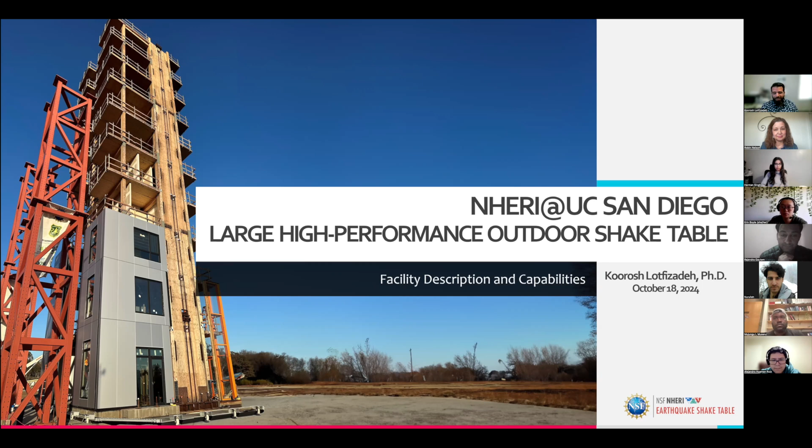Today, I'm going to briefly go over the shake table facility, what we do here, the importance of it, just to give you an idea of the type of work we do, and hopefully inspire some people to pursue this kind of work. As an outline, we're going to briefly go over the Englekirk Structural Engineering Center, the home to the shake table facility. I'll talk about the shake table itself in the original configuration, the upgrade that we did recently to bring it up to 6 degrees of freedom, give it its full potential. We're going to look at some of our instrumentation and our data acquisition system that we have available here to collect the important data that we want, and maybe touch on some new research opportunities that are made possible by this facility.

So who are we? The leadership team at the NHERI at UC San Diego Shake Table facility consists of a principal investigator, currently Professor Joel Conte, and 4 co-PIs and myself. In the coming weeks, we are going to have a little bit of a change with the leadership. John McCartney is going to be the new PI, and Joel Conte is going to be a co-PI, but that hasn't happened yet. So for now, this is the current breakdown of the leadership team at this facility.

There's a lot of text here. I don't expect anyone to read it right now, but if you want to reference it later, it gives a little blurb about what each person is responsible for at the facility. Running and operating such a large scale experimental facility requires a lot of work, and it's too much for just one person to handle. So we break it out in a work breakdown structure, and each co-PI has their own domain where they focus. So you can read that at a later time.

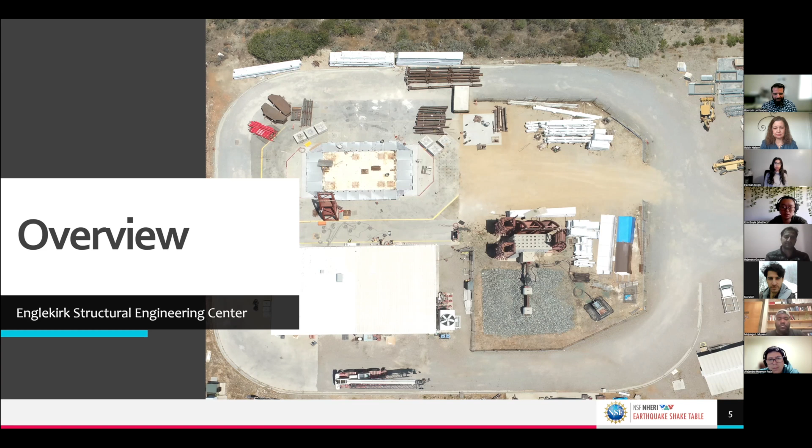An overview of the Englekirk Structural Engineering Center. So I mentioned that name. It's more than just the shake table. We have a large facility that's about 10 miles east of the main campus at UC San Diego. It's kind of a bummer because the main campus is right by the beach, but we're inland a little bit. But we have more than just the shake table. And just to give you an idea, the shake table is what you see here in this yellow color.

platform, but the facility extends way beyond it, and it kind of continues on to this side. We have two large soil pits and a strong wall, if you will, a reaction wall, where we can attach actuators, embed specimens inside either the north or the south soil pit. And just for reference, down here on the screen is the north side, above the screen is the south side. So we can attach actuators and do some testing, cyclic testing as needed in these soil pits for soil structure

interaction. We have, of course, the shake table facility and another facility, our blast simulator or extreme event simulator facility. It's been offline for a little while. We're working actively to bring that back online and refurbish the equipment. What that facility is capable of doing is simulate blast events or impact loading without using explosives. So it uses some really high-speed actuators that can generate incredible forces at an impulse and retract, not have that follow through. So you simulate an actual explosion type of event.

In addition to what you see here that I didn't even highlight, we have some geothermal work that we do with solar arrays in the back over here. And along the entire length at the back of our facility, we have a full-scale railroad where we can do non-destructive testing and damage detection on rails. So we do a lot of work, but this presentation primarily focuses on the shake table facility.

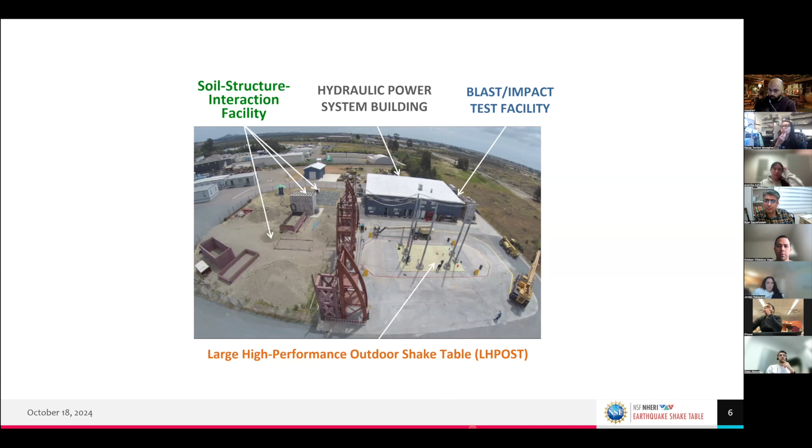The Englekirk Center, our center, we are an accredited ISO 17025 testing laboratory. So all the data that we produce here is accepted in more than 80 countries around the world with no questions asked, because all of our equipment, all of our sensors are fully calibrated and documented and traceable. So the data that we collect is, of course, vital. You don't run an experiment and not collect any data. That kind of is pointless. So it's a pretty important thing to have this type of accreditation.

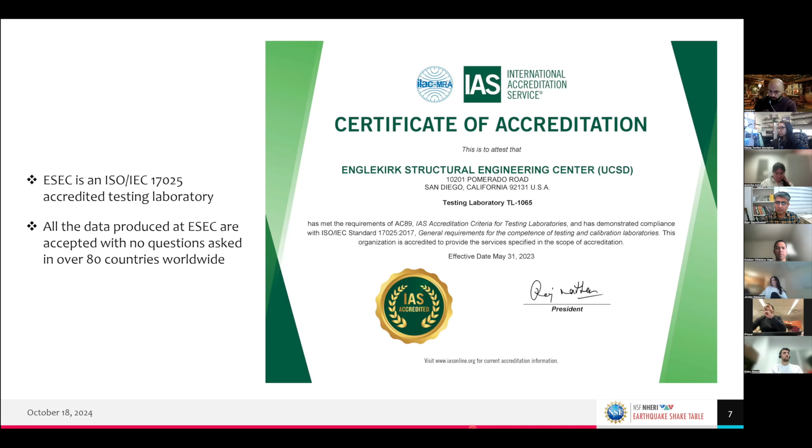So the shake table itself, let's talk about this a little bit. We've been in business for about 20 years now. Brief history of the shake table. It was designed and built in 2001 through 2004. It was commissioned in 2004. It was originally funded by NSF under the George E. Brown Network for Earthquake Engineering Simulation, the NEES program. And we got some additional funding from the Department of Defense to build this shake table.

From 2004 to 2014, our operations and maintenance was funded through the NEES program. There were two chunks of 5 years, similar to NHERI. That evolved into the NHERI program in 2016. We were funded through the NHERI program through 2022. But somewhere along the line in 2018, we got funding from NSF and some additional funds from the university here to upgrade the shake table to 6 degrees of freedom. This gives us a lot more capabilities, and we'll talk about that in a little bit. We reopened the facility around April, I want to say, of 2022, and we've been back in business since then, and our operations and maintenance has been funded through the NSF NHERI program.

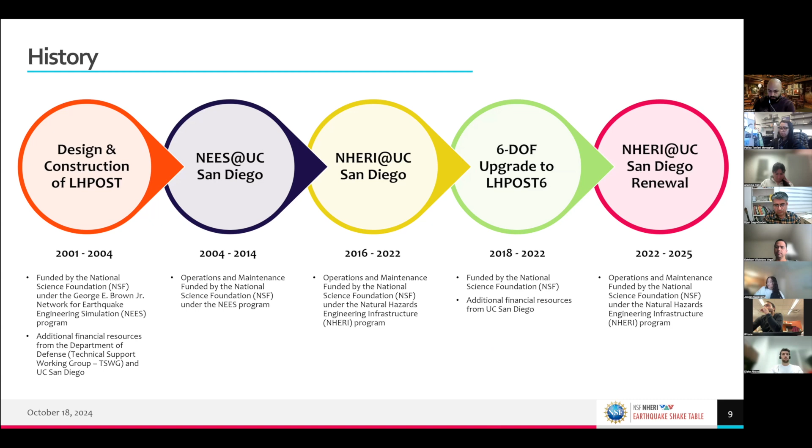So the original shake table that was built 20 years ago was a single degree of freedom shake table. We used to have an actuator on the west side and an actuator on the east side, and we could only shake in one direction. We call that single degree of freedom. The platen itself is rather large. It doesn't look huge on this picture here, but it's 12.2 meters by 7.6 meters, so 40 feet by 25 feet. And it's a pretty large, heavy steel platen. And we can build specimens on it and attach it to the shake table and run some tests.

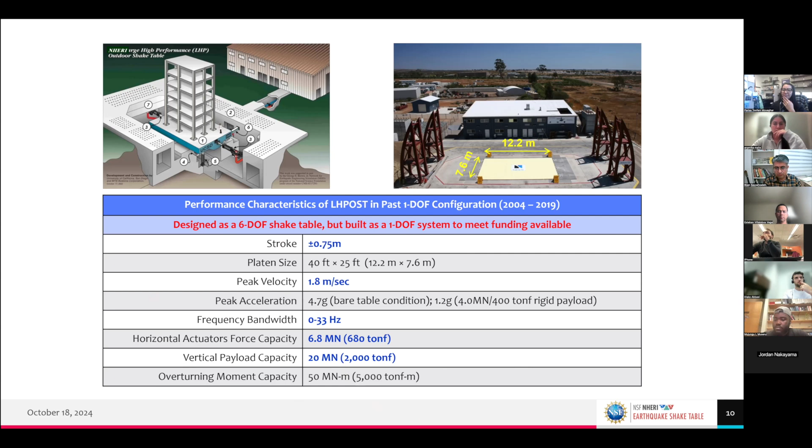It was always designed to be a 6 degree of freedom shake table. Now, when I say 6 degrees of freedom, I mean you can move in the horizontal direction, you can move in the lateral direction, you can go up and down, so you got all your translational movements. And in addition to all that, you have your rotational degrees of freedom. So you have your rolling, your pitching, and your yaw motions as well. So with all those 6 degrees of freedom, you can move in any direction physically possible. Of course, within some limits, you can't just infinitely rotate. But here, again, I'm not going to bore you all with the details. You can reference this later if you'd like. But we have some performance characteristics of the stroke and the accelerations and velocities, etc., of the original system.

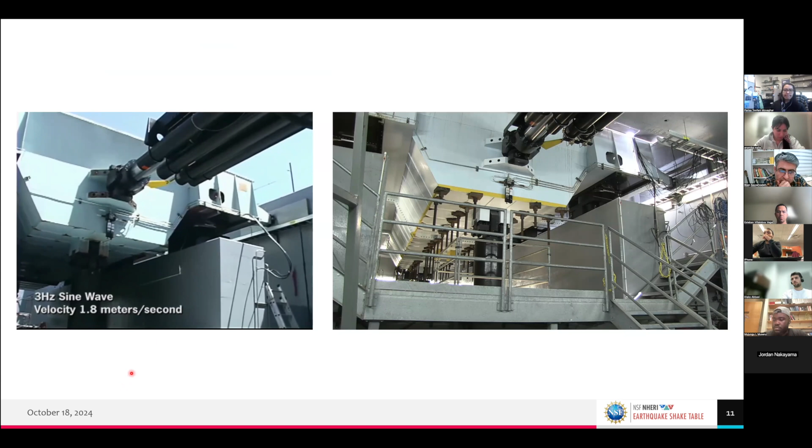Now, this is all abstract, so let's take a look at a video. On the left side here, you're going to see this is when we were commissioning the shake table back in, I want to say 2003, early 2004, where we're just demonstrating that this system can push and pull the shake table with a sine wave. So just kind of cycle it back and forth at its capacity, 1.8 meters per second. So that's pretty violent. But we rarely just do cycles. We want to play back an actual earthquake. So this is after the commissioning process was complete. This is an actual earthquake.

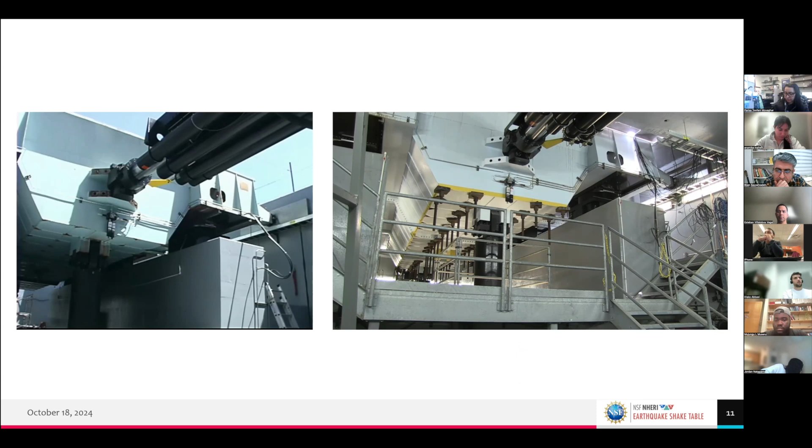Yeah, pretty standard. But you can see that we can only push and pull the shake table in one direction. At that point, we still had very good tracking performance. When you give it an input ground motion, you want to replicate an earthquake that has already happened, we usually have an acceleration time history. So here in this little graph, you'll see an acceleration time history in units g over time in seconds. And if you zoom in, you can see that the target and our achieved was very, very close. So we were able to reproduce ground motions pretty accurately 20 years ago.

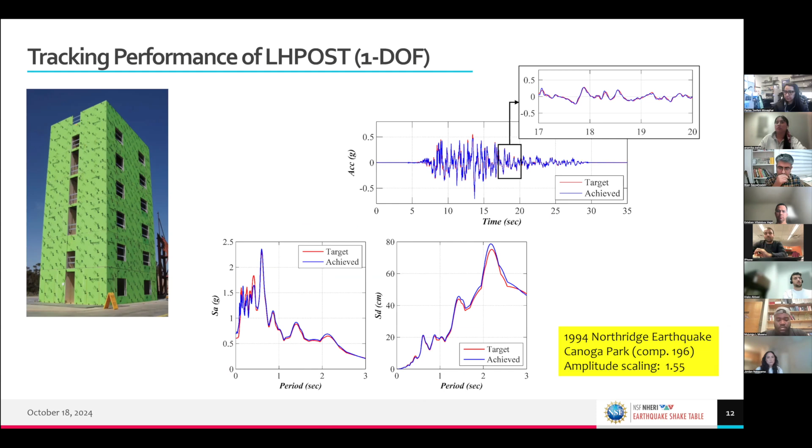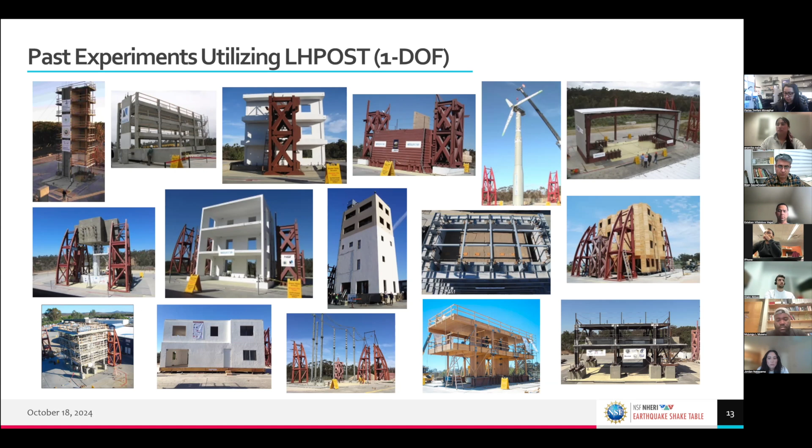You got your spectral accelerations and your displacements as well, and we were able to hit those targets with very high accuracy. This allowed us to complete over 30 major projects on the shake table, ranging all sorts of different buildings. So we had power transmission lines, reinforced concrete buildings, a parking structure, wind turbines, some geotechnical soil boxes with embedded piles and sound walls, timber buildings, masonry buildings, all sorts of things, you name it. We've done some testing on this stuff. And it's been very helpful and useful for the entire natural hazards community because you do need experimental data to validate your models. And we'll talk about this in just a second too.

So looking a little closer at some of the past work that we've done here, this is an example of a project that was conducted, I want to say in 2011 or 12 maybe. It was a 5-story building, and this was a major project with high importance for this community because it was performed with 2 different systems. There was a fixed base configuration, which is a standard old building that's attached to the ground. And there was a base isolated version of this building. So we tested both phases to see the performance difference.

Now, if you're not familiar with base isolation, it's basically a layer that you put in between your structure and the ground that would separate the two and allow the ground to move at whatever frequency and acceleration that it is. And that doesn't necessarily fully translate to the structure itself. So we'll see coming up how that actually performed.

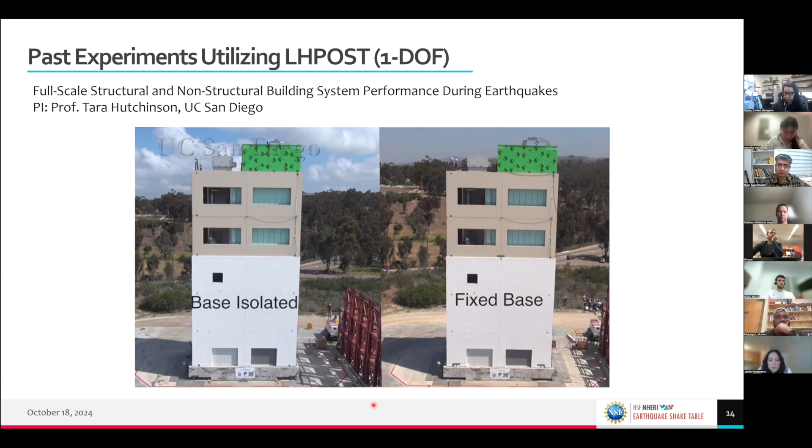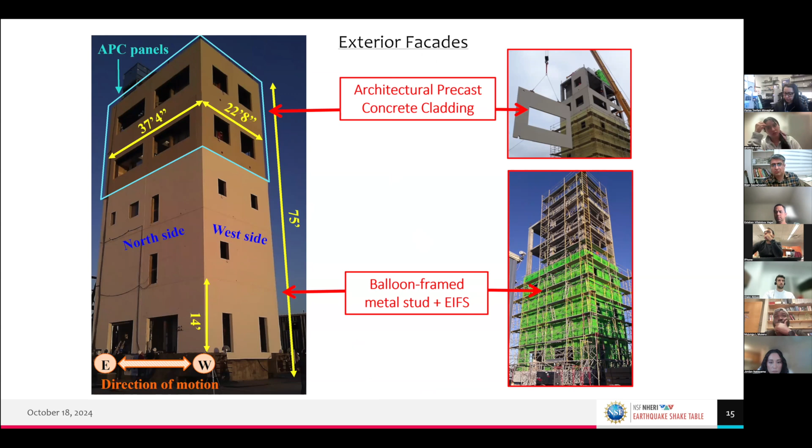This building, we call it the BNCS program. It was a 3-phase project on the shake table. It was a total building system with cladding and the facades. On the top couple of floors, we had precast concrete cladding. On the lower floors, there were balloon frame metal studs with a stucco finish system. It was 5 stories tall. Each floor had a different occupancy type, so we wanted to see how these non-structural components would perform during an earthquake. Also very, very critical for our community.

The bottom floor was modeled as a utility closet where we have utilities. There was a lab and a residential floor. There was a server room that later in one of the phases we actually set fire to. There was an ICU unit fully equipped with hospital beds. There's a surgical suite with equipment hanging from the ceiling. There was a full working elevator and a staircase inside this, and there were garage doors and different types of windows and doors throughout the building.

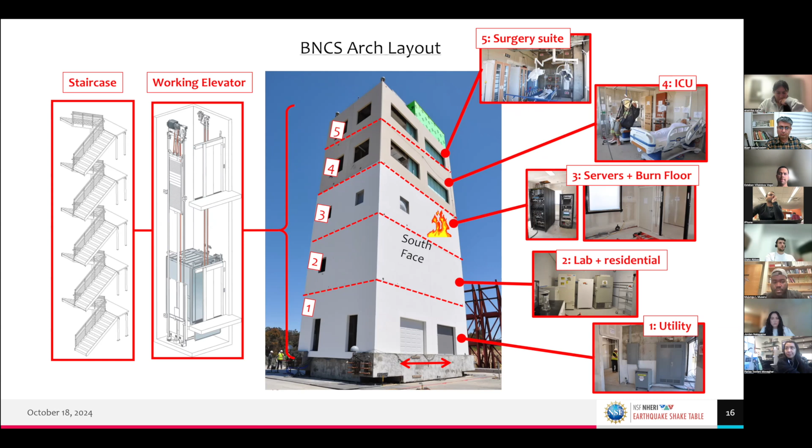So this was an all-encapsulating kind of project to see the performance of not only the structural components, but also these very, very critical non-structural elements inside a building. You wouldn't want to be getting operated on and there's an earthquake and suddenly the equipment just falls off. That doesn't sound very good. So this building, we'll watch a little video here of the performance. There's too much information here, so we're not going to talk too much about it.

But this thing that you see here is a base isolator. This is basically a lead core with rubber on the outside. On one end, it's attached to the ground, or the shake table in this case. And on the other, the building kind of sits on it and is attached to it. So you'll see as it's moving, the isolator kind of stretches and moves around, not translating all of the forces directly to the building. We have a little hysteresis plot here that can show the shear strain and the base shear on the building as well.

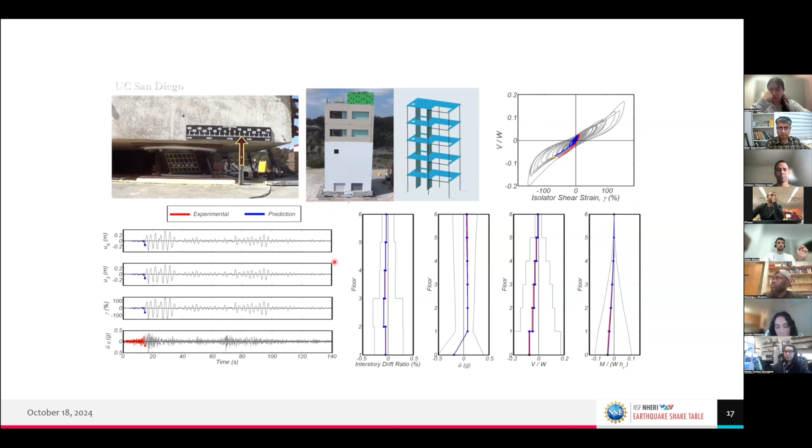In this video, we're going to see two comparisons. We're going to see a base isolated version and the fixed base version. So let's just take a look at this really quick.

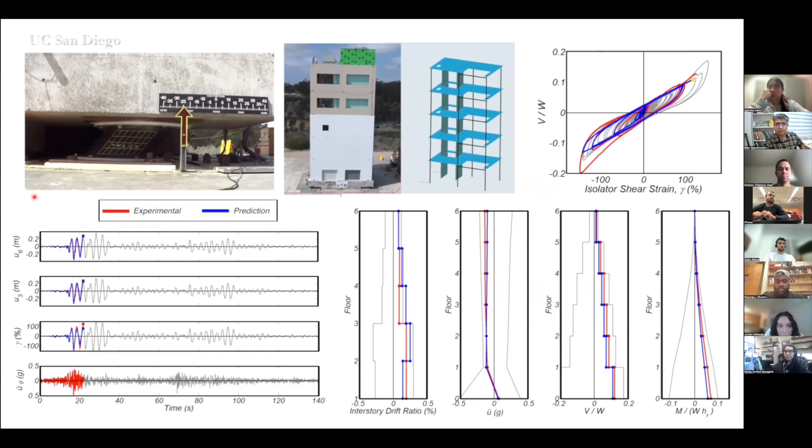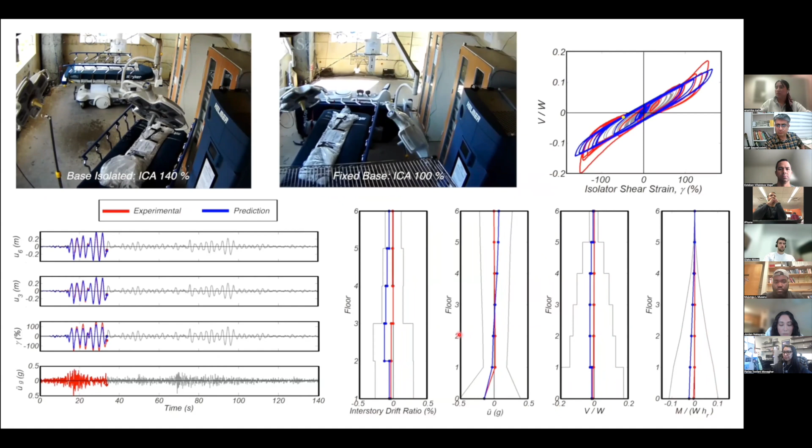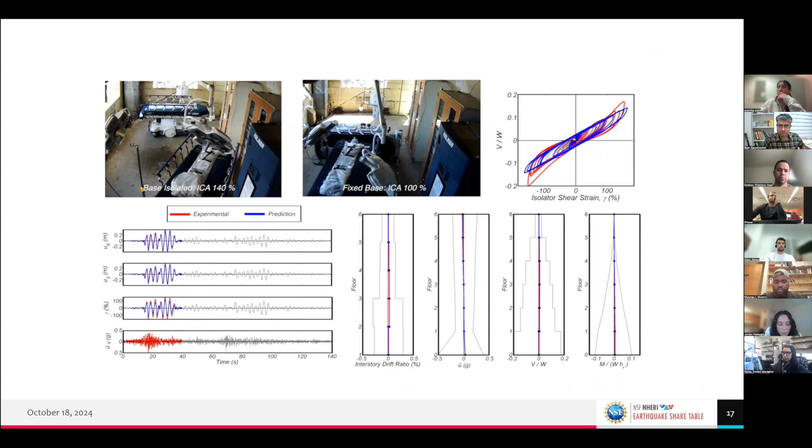So you can see as we're moving here, that isolator is really stretching, dissipating energy as it goes. And here is the base isolated and a fixed base. And you can see the difference in performance when you have a base isolator or you don't. An important thing to note is this is 100% scale of an earthquake from Peru. The base isolated version was 140% scale. So even higher scale accelerations, and the performance was so much better inside the building, just to demonstrate how critical that type of isolation system is.

Another important thing, and the reason I'm showing all of this, is the work we do is very important. There are some structural failures that are really difficult to capture accurately in computational models. Some of them could be bond slip, there's rebar buckling and fracture, there's slab failures at the column joints, a whole host of failure mechanisms are really complicated to capture.

So having these large-scale or full-scale experiments to see how these perform and collect data, we can validate our models, we can improve our models, and eventually progressively move away from relying on experimental testing and improve our models to a point where we can rely more and more on that. So we don't have to spend so much money and time on large experiments.

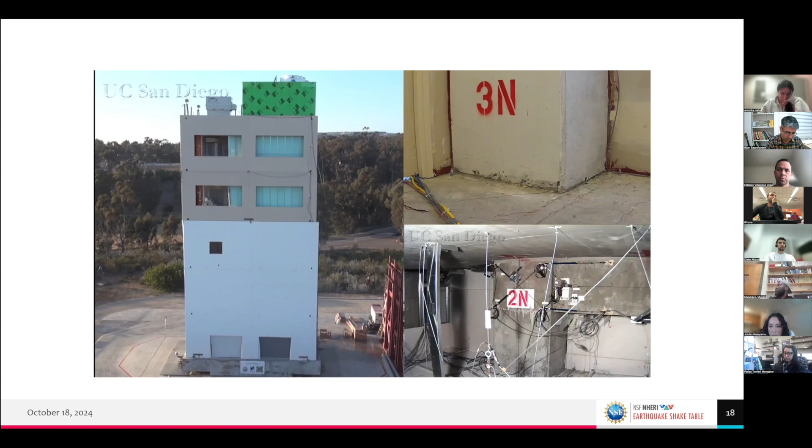This little video here, again, it's a short little clip. You'll see at the top, this is the slab, the floor, and a column on the third floor. You'll see the slab failure as this building is shaking. You'll see it start to pull and rotate, and that slab is failing at that connection. Right below it, on the second floor at the drop ceiling, this is a beam column connection. You'll see that as it's moving, there's some rebar at this joint here that buckle and fracture, and you'll see some little concrete exploding out as those rebars start to fail. So all of these failure mechanisms are really difficult to capture accurately in a model if you don't have this kind of baseline test data.

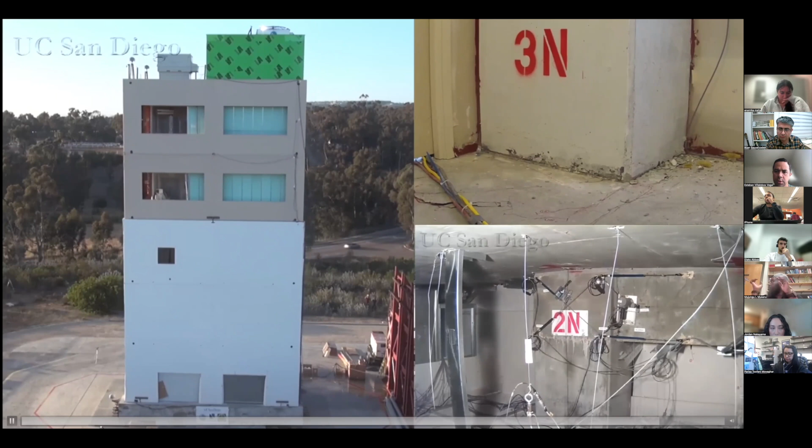So here we go, let's take a look at this. You see that slab here kind of bending up. That's a pretty bad failure. And boom, we just saw that explosion here with some rebar. And that joint is just fully opening and closing at this point. So it's lost quite a bit of its integrity. This is a fixed base test, by the way, not one of the base isolated tests. Oh, I forgot to mention at the top, there was also a full chiller system where you saw some water falling out as we were shaking it. So that was kind of cool.

I did mention earlier that we did some geotechnical experiments as well. So we can investigate a lot of soil structure interaction type of performance for structural systems using two large soil boxes that we have available at our facility. One of them is a laminar soil shear box that has multiple layers with rollers in between so they can move relative to one another. And one of them is a large stiff confinement box that you can embed specimens into, create retaining walls and things of that nature.

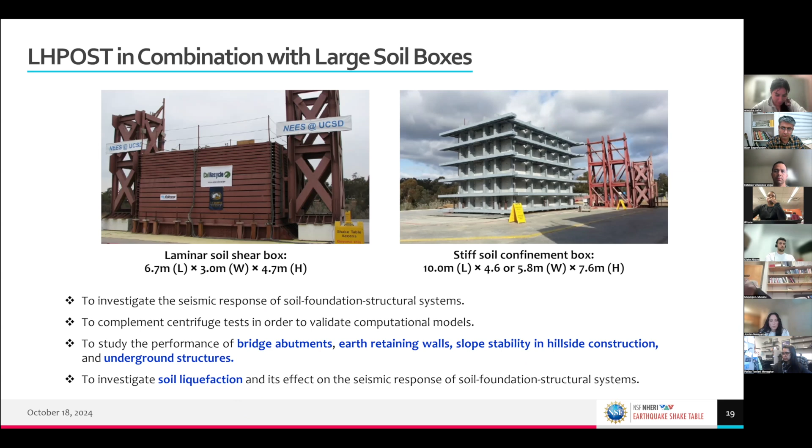So using these boxes on the shake table, we can validate our computational models and complement the centrifuge tests, because those are often on a really smaller scale. We can study the performance of bridge abutments, retaining walls, slope stability, hillside construction, and underground structures. So if you have a tunnel that you want to embed under the soil, we can do that kind of work. And of course, we can check liquefaction using the laminar soil box as well. If you're not familiar with liquefaction, it's when you saturate soil and as it shakes, it tends to kind of liquefy at the top. And that causes massive problems for structures that are built on top.

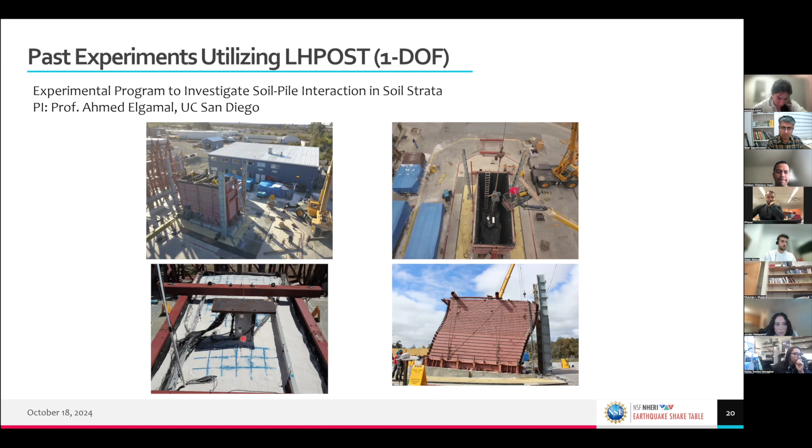Just another quick demonstration of one of the past experiments that we did here at the shake table, during the earlier phase in the single degree of freedom. This was a project that utilized the laminar soil box installed on a wedge to simulate a slope. This picture is after the test is already completed, but you can see how it deformed and each layer of that soil had moved relative to one another. Inside this box, they had a pile that was embedded, and I'll show you the video on the next slide of just how critical it is to have this type of box to do this testing. So we're going to take a look at this video. Just pay attention here. You'll see this pile, as you're shaking, it starts to walk. It starts to move.

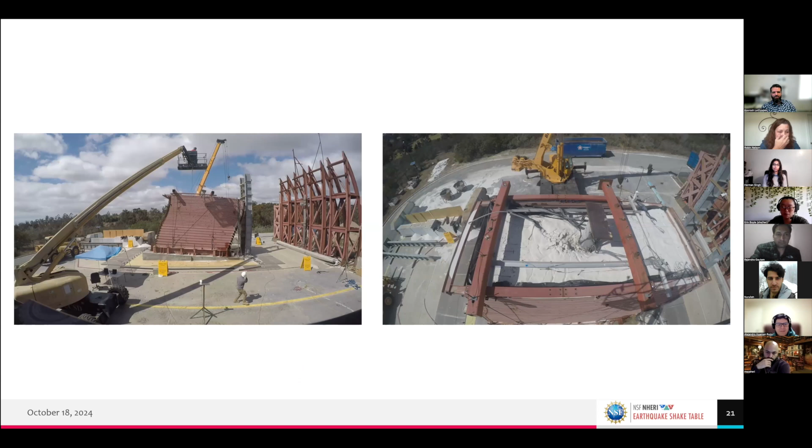Okay, so all of that was the single degree of freedom shake table. So we did all that critical work in just one direction of shaking. When we upgraded this system to 6 degrees of freedom, this opens up a whole new world of possibilities for us. The upgrade, just to show you what it looks like now: in the earlier slide, we had a little picture of the single degree where we had one actuator mounted on this end and one actuator on this end. This is just a little rendering, a little slice so you can see the insides.

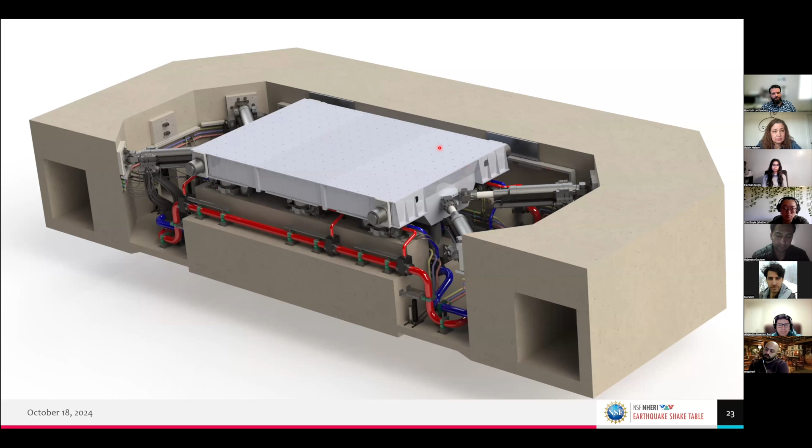Now we have 2 actuators on either side positioned in a V shape, and we have 6 vertical actuators underneath the shake table for the upward motion. So you'll see 3 of them on the north side that we're looking at right now, and then there's 3 mirrored on the south side. All of this is powered by a massive hydraulic system. Well, this all had to be redone for this upgrade because we now needed a lot more hydraulic fluid, a lot higher velocities, a lot higher flow, a lot of pressure.

So just to give you a brief overview of this, some of you have maybe been on a tour here at the facility. Those that aren't familiar, I'll spend a minute just looking at this. We have a large surge tank here that stores about 5,000 gallons of our hydraulic fluid. We have 4 pumps, I call them a bunch, but these pumps take that oil and pressurize an accumulation system that stores this high pressure fluid. And when we need it, we've got these blowdown manifolds down here that release that high pressure oil through the red pipe going under the shake table.

So this is all under the shake table. What you saw, the vertical actuators are right here. And then you can't see in this picture, but there's some horizontal actuators on that end. So all that high pressure fluid comes through, creates a little ring around and feeds oil to each one of these actuators. And that's how they move. When that energy is spent, that low pressure oil returns through the blue pipes and goes back into that tank, and that whole cycle repeats as we need it to. All of this had to be redone. These pipes, everything had to be reworked and enhanced in size for this upgrade project.

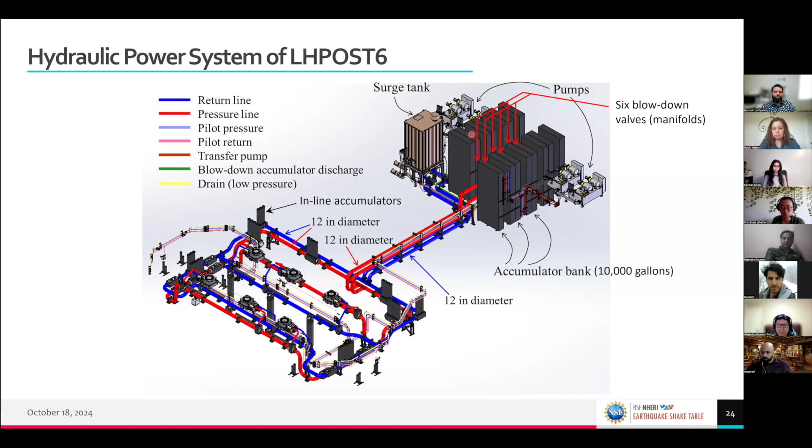Now, I did mention the accumulator banks here. We can't run with direct pump. We need some sort of accumulation. If we were to use just pump power, we would need 100 of these pumps, or I don't know how many, to generate enough flow for the actuators to move as we want them to. So in order to avoid that, we use an accumulation system. The accumulation system consists of 75 large bottles that are about 130 gallon capacity each. And inside each bottle, there's a piston. On one side of the piston, we store 3,000 PSI nitrogen. And those pumps pump oil to the other side of the piston, increasing that pressure to 5,000 PSI.

And once the pressure inside each one of these bottles reaches 5,000 PSI, we close off the valves. We store that high pressure oil inside. And as we need that oil, we blow it down through those red pipes that we saw earlier to the actuators. All of this is really critical, and we need to keep an eye on the pressure inside each one of these bottles, the temperature, some metrics, because we need to make sure everything's operating properly.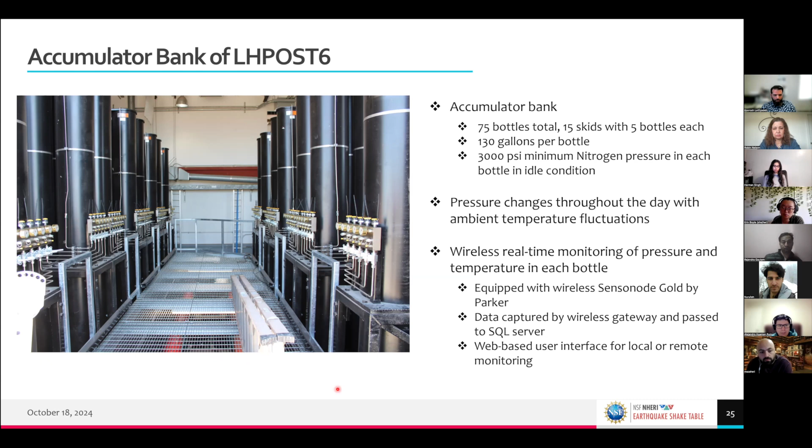We have some analog gauges. You kind of can see them in the picture. Each one of these bottles has a gauge on it that shows you the pressure. But when the system is on, it's too dangerous to be in this room. So these analog gauges really aren't very useful. So to bypass that, we have these wireless sensors. You'll see all of them at the top here that collect this critical information, pass it on to our gateway, and I have my own server and database that I store all this in.

And we create little dashboards to visualize and trend the pressure and the temperature and all that. So just to show you what I see, we can see the pressure over time. And these fluctuations that you see, it's kind of interesting that as the temperature fluctuates throughout the day, you naturally get pressure variations. And this is all important.

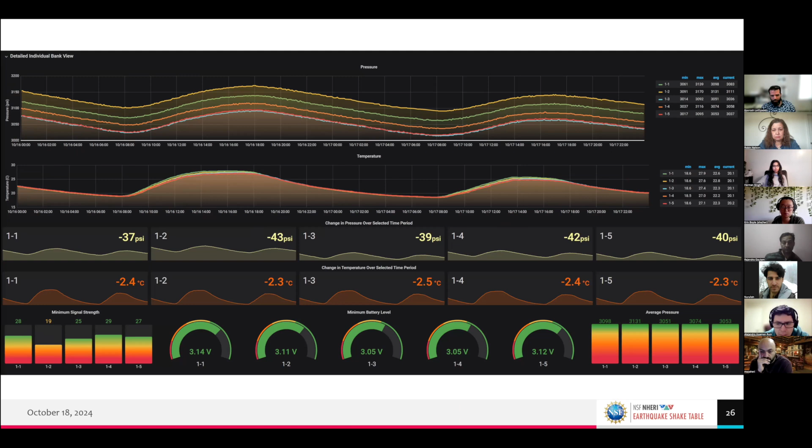And previously, we weren't able to see all this because you only have an analog gauge, so you only get a little snapshot in time. But we can actually see the current pressure in each one of the bottles in real time as we're operating the table. So it's kind of a big deal.

Once again, performance characteristics. This is now a 6-degree of freedom table. I don't expect anyone to read all this. I'm not going to bore you with it. You can reference it later if you're interested. We still have, of course, the same platen, the same 40-foot by 25-foot platen. Our frequency bandwidth hasn't changed.

Our vertical payload capacity now, since we can move vertical, is very large. It's actually the largest in the world. It's 20 meganewtons, so 4.5-ish million pounds. If you ever do reference this table later on, just keep in mind that it's split into 2 sections.

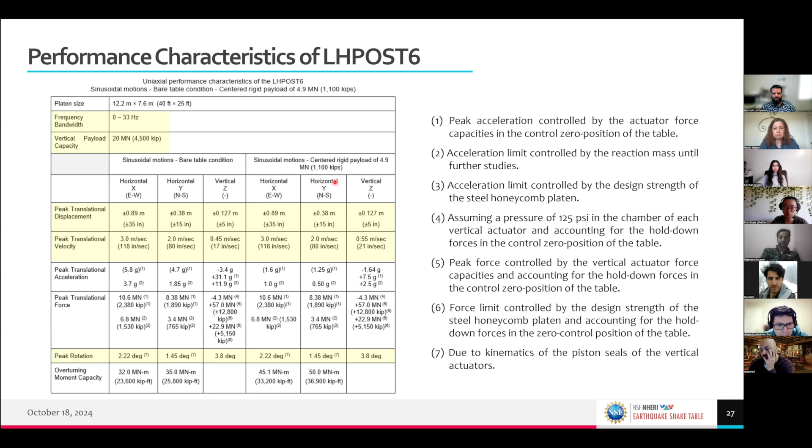There's the bare table condition, and then there's the condition where we assume a centered rigid payload of 4.9 meganewtons or 1.1 million pounds. So the characteristics are a little different depending on what you have on the shake table. Again, we're just going to blow right past it.

One thing I didn't mention is the shake table is a 3-variable control. So we can control it using acceleration or velocity or displacement. We can choose what we want to control it as. We typically, for earthquakes, control with acceleration because that's the ground motion that we generally care about.

So let's take a look at some shake table movements just so you can get an idea of what it looks like when it moves. This is when we were going through our commissioning, so all these protective covers are not installed, so we can actually see what's going on.

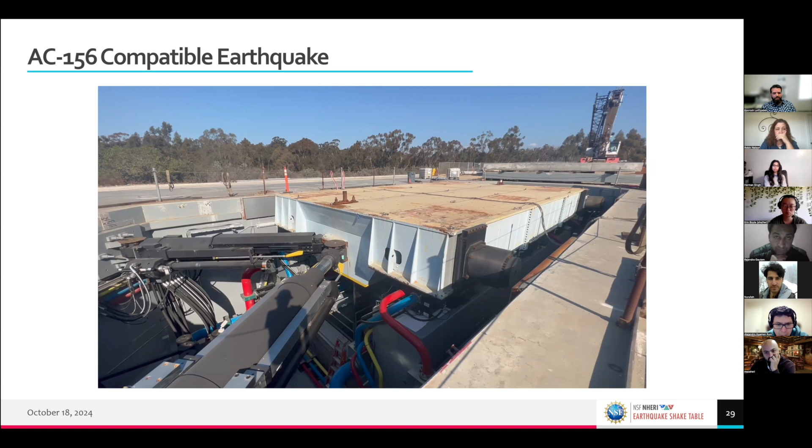What we're about to look at is an AC 156 compatible earthquake, usually used for seismic qualification of equipment. This is in 3 degrees, so it's XYZ, but there's no rotations involved in this. But it'll give you a little sense of just how violent and impressive it can be.

I don't know if the video is coming through okay or not. Sometimes Zoom isn't really friendly. I wouldn't want to be on that.

And lastly here, we wanted to demonstrate the rotational degrees of freedom. So we couldn't find any ground motions that had all 6 degrees of freedom. So we made a synthetic one just to demonstrate what it looks like when we actually rotate this. And I actually really enjoy this video because it looks kind of like the ocean. It's very fluid as it moves.

We do have limitations on how much we can rotate. And if you look back at the characteristics that I showed on the screen, it's only a couple degrees. You see it says rotation about the x-axis is only 2 degrees. When you actually put it in perspective, that's massive considering the size of this thing. So rotating 1 degree or 2 degrees over 40 feet is a rather large rotation. That was just to show how the system looks.

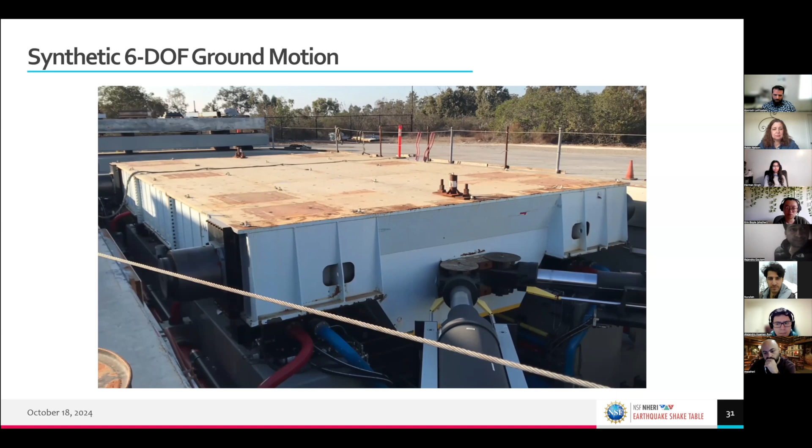So we did all this. We upgraded the shake table, and we reopened in 2022, and we immediately went on to testing the tallest building ever tested on a shake table. It was a 10-story mass timber building, a collaboration with several universities. The PI was Professor Shiling Pei over at Colorado School of Mines.

This building was fascinating in many ways. There were 10 stories, mass timber, a proof of concept type of building to allow mass timber structures in seismic regions to exceed a certain height limit because our code currently limits that. There were several interesting mechanisms here.

I'm not going to go too in depth with the details, but on the lower 3 floors, on all 4 sides of the building, there were different types of facades. So they were investigating different types of facade, cladding, windows, doors, etc.

But the coolest thing about this was the lateral force resistance system. These large walls that you see go up all along the height of the building, they were rocking walls. So at the base, they're not fixed to the ground.

During motion, they were able to rock back and forth. And along the height of these walls, maybe you can see there's little cutouts on the sides. There were little energy dissipation, U-shaped steel plates that, as that wall would rock back and forth, would dissipate energy through yielding. So along the height, you would have energy dissipation. There was some post-tensioning that went all the way down for the recentering force to bring that wall back to plumb after the event. So that was really cool.

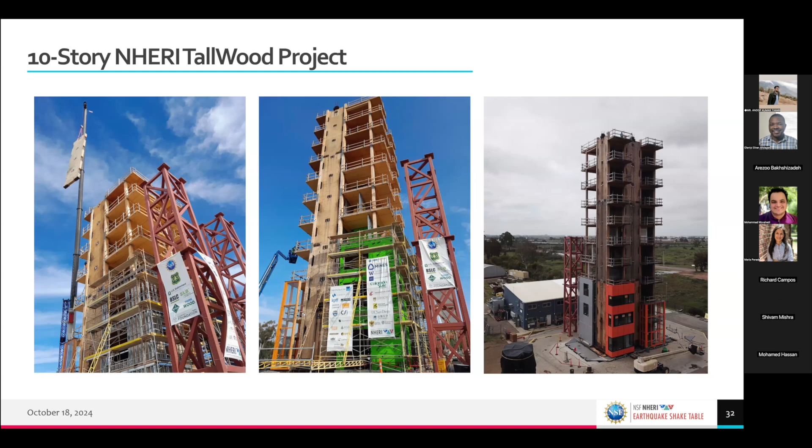Just take a look at one video here, an overall view of the Loma Prieta earthquake, MCE level. Just for those that aren't aware, an MCE level earthquake is an earthquake that has a mean return period of almost 2,500 years. So it's a very rare earthquake, and it's rather large in magnitude and can be catastrophic. So this is one that happened in Loma Prieta in 1989.

You'll see inside the building where there was the staircase, there's a column, and this one is just to show you how these columns had an interesting two-way pin mechanism at the base to allow rotations while still being able to carry the load. And the corner of one of these rocking walls, so that's at the base of one of these walls here. As we're shaking it, you'll see this base just kind of lift up, open and close during the motion.

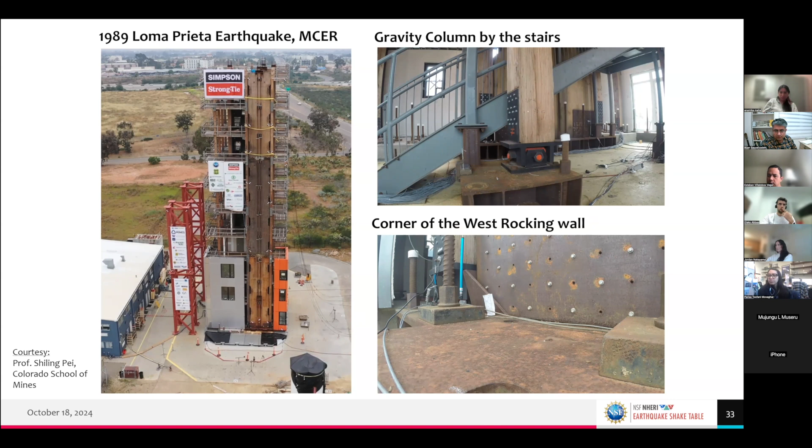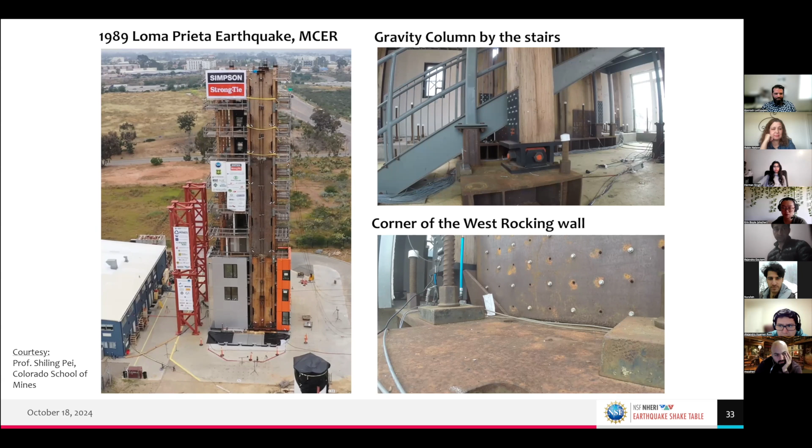Ooh, sorry, that was louder than I thought it would be.

So yeah, that was a very interesting project. Now we finished that, we did some other work, and now we're finally embarking on our next project, which is another 10-story building that we just broke ground on Monday. This one is going to be cold-formed steel. It's colloquially known as CFS10 because it's a 10-story building.

It's a little bit shorter than the mass timber building. That one was about 120 feet tall. This is 100 feet tall. So it's not going to break that record, but it's still an impressive feat. This is a full-scale slice of an archetype building that's designed in common cold-formed steel standards of today. Obviously you can't fit the entire building on the shake table, so this one is going to be a slice of that building.

And there's some interesting things that this project is going to focus on. Currently, we're also height limited for cold-formed steel buildings. ASCE 7, the design code, says to go less than 65 feet in height, and this one's going to push that to 100 feet. So that's going to be one of the main things to look at. This one's also got a full facade and doors and windows and non-structural elements inside.

And there's 2 phases to this project. This one's going to have an earthquake phase where we do our earthquake shaking. And after that, there's going to be a multi-hazard investigation. So we want to know what happens in case there's a fire after an earthquake. Once we've done all the earthquake testing, 4 of these floors are going to get set on fire. I think they're going to be set on fire independently.

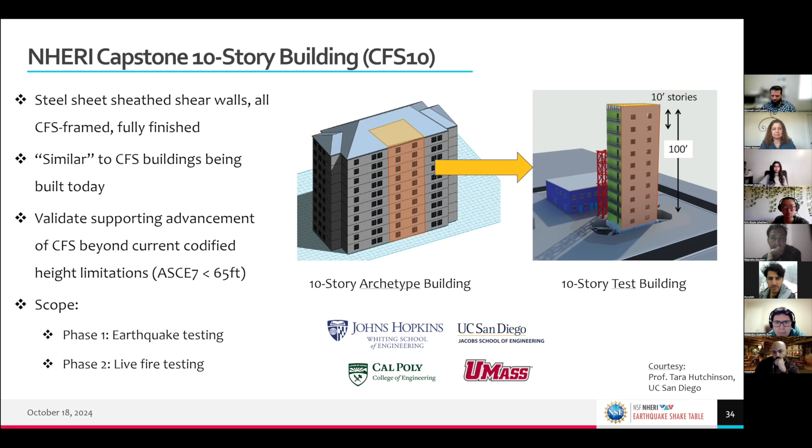All right, bored you enough with that. Let's switch gears here and look at some instrumentation and data acquisition, and I promise I'll keep it as short as I can. I mentioned earlier, instrumentation and data acquisition are very critical for everything we do here. Without it, all these tests are kind of pointless. So we need to be able to collect the data, collect it properly, and then store it securely.

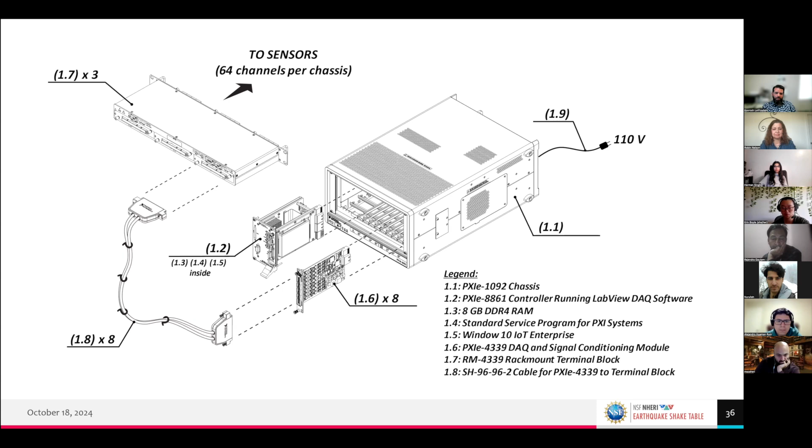Our data acquisition system, I'm not going to explain all this stuff, is a state-of-the-art 24-bit system. We purchased it through National Instruments and built the entire thing ourselves. We have 13 what we call nodes. Each system, we consider to be a node. Each node is capable of recording 64 channels, so 64 sensors can connect to it and we can acquire data. It's 24-bit ADC resolution, capable of 25,000 samples per second, simultaneous sampling.

And it's very scalable. The way we currently have this set up is we have it in 3 stacks, A, B, and C. And each stack has several nodes inside it. And they're all interconnected, so they're fully synchronized with each other. Now, the Shake Table controller has a trigger output that we feed to each one of these 3 stacks to make sure that when we run an earthquake, we're recording the data simultaneously with the Shake Table.

So you can cross-reference and check the data that you got from your sensors with the movement of the Shake Table and make sure that they're all in sync with each other. In addition to the data acquisition, the Shake Table control outputs another trigger line to our video recording system where we have a whole bunch of cameras that record video. So all of our Shake Table movement data, the instrumentation and data acquisition data, and our video and picture data are all fully synchronized. And they're all connected on a local network, and we have a local dedicated PC that operates these systems.

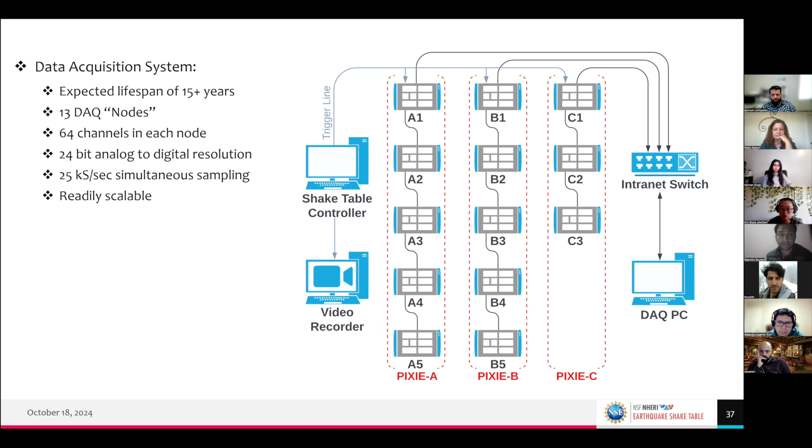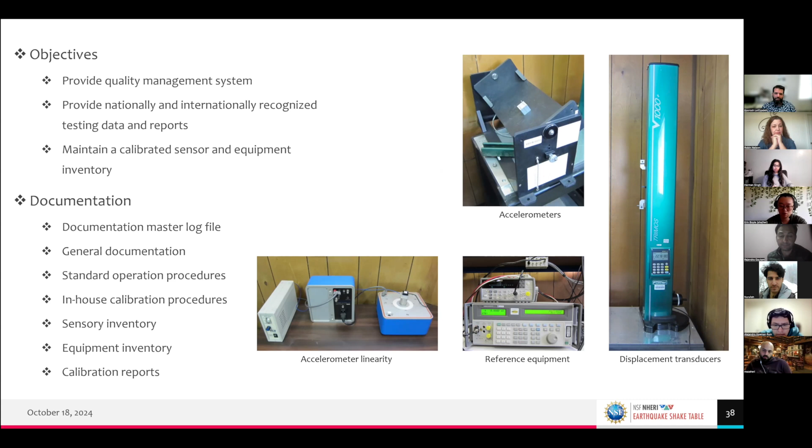Our main objective, of course, is to provide quality data and make sure our equipment is in tip-top shape and everything is traceable. So to do that, we need to maintain calibrations. We have to have proper documentation and all that. So we have many equipment available to perform standard calibrations on all of our equipment, and we do this every year or every 2 years as needed per device to make sure everything is properly maintained.

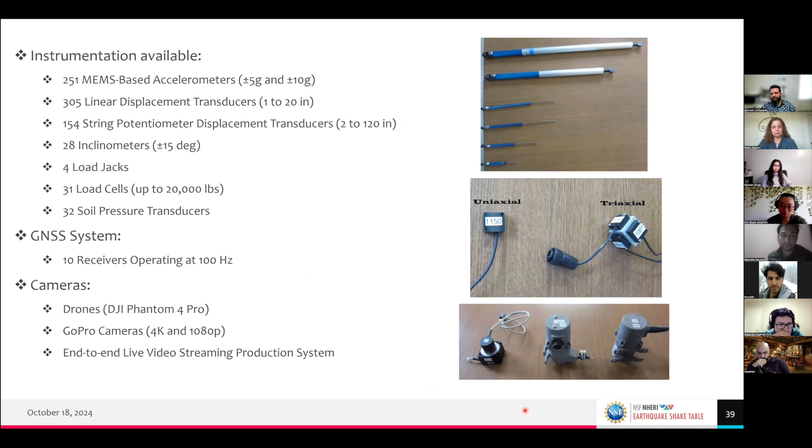So some of the instrumentation that we have available, we typically use a lot of accelerometers, linear displacement transducers, inclinometers. There's some load cells and things. Primarily what people tend to use on research when you're dealing with Shake Table stuff or seismic work is accelerometers and displacement transducers. Now, whether they be linear displacement transducers like what you see in this picture, or the string potentiometer displacement transducers like you see down here, they all just measure displacements. And accelerometers obviously measure accelerations.

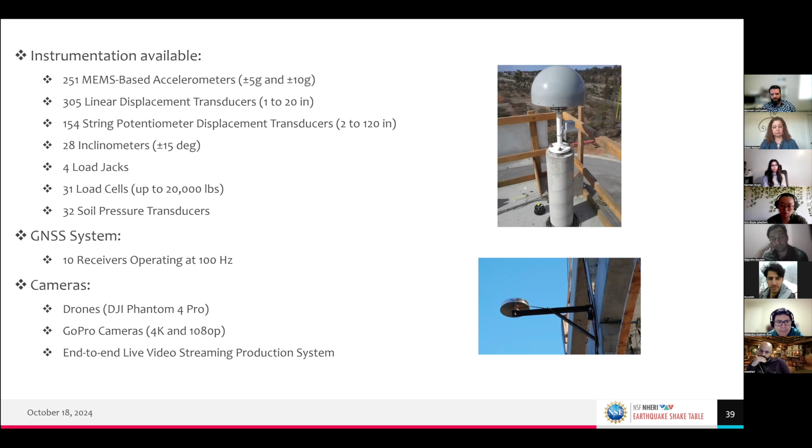In addition to that, when you're dealing with these tall buildings, you can't really measure the displacement at the top of a 10-story building because you don't have a reference column that tall to measure off of. So for those types of tests, we have a GNSS system with 10 receivers that operate at 100 hertz. So we can collect reliable displacement data at heights that you just don't have any reference for. And of course, I mentioned earlier, we have a bunch of cameras and drones that we also use with all of the tests that we do here.

Up until now, we haven't been collecting rotational information from earthquakes for 2 main reasons. One being seismologists, they didn't think it was that big of a deal. They're like, the rotations aren't that big of a deal, they're not going to affect anything as much. They're small rotations in the Earth. So they're like, we don't need to worry about it. And two, it's actually quite difficult to collect rotational information from earthquakes. So we haven't had that up until now.

But recently, Trifunac in 2009 demonstrated that the ground, as it rotates and as you have some horizontal translation, it can really impact the overall drift of your building. So if your ground is moving horizontally and it's rotating, the top of the building, especially if it's a tall structure, that drift amount is enhanced significantly. So even if you have a very small rotation on the Earth, it can have really dramatic consequences on a building. So as this knowledge is becoming more and more prevalent in our community, the need for a 6 degree of freedom shake table is becoming more clear.